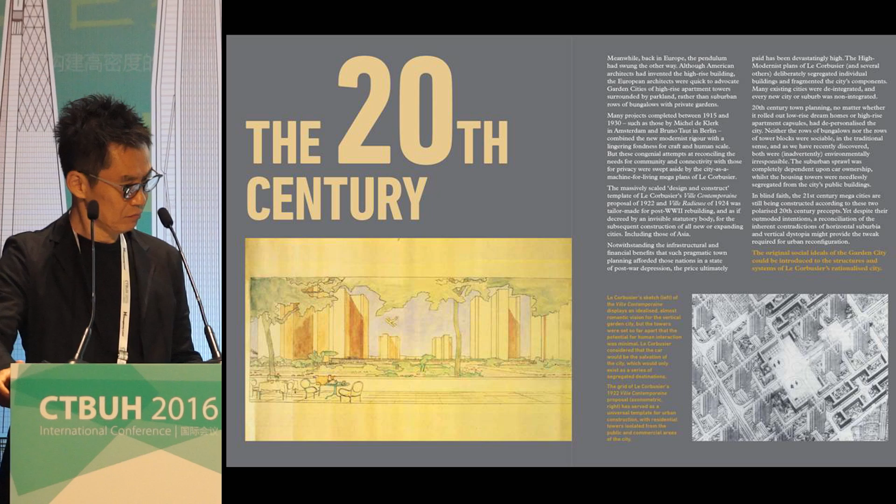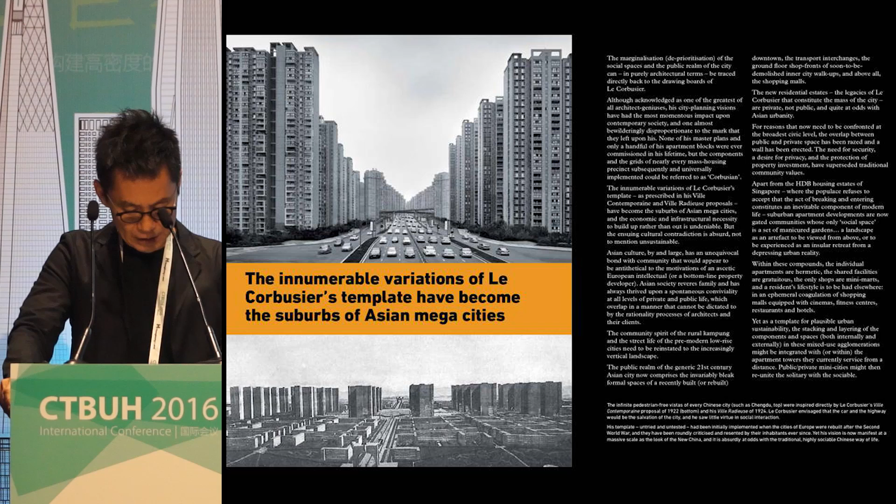Modern megacities are a joyless exploitation of the Corbusian paradigm. Our megacities are horizontally extensive, lacking in distinction, rather inhumane. Developments are distinct islands marooned by vehicular traffic, people regarded second to the automobile. Buildings tend to be mono-use, making it necessary to traverse the city to get about the day.

In the wake of the Industrial Revolution, the phrase Garden City was coined in 1898 by Ebenezer Howard, who perceived the possibilities offered by England's newly installed rail networks. London's workers did not reside within the metropolis, but commuted from pleasant new towns in the surrounding countryside. The garden cities were intended to be self-sufficient cities, separated by parks, connected by rails, and residents living in harmony with nature.

The exuberance of 1920s New York engendered heroic yet romantic visions for future cities which sought to further monumentalize Manhattan. The Metropolis of Tomorrow, as published by Hugh Ferriss, shows the city both traditional and futuristic, a humanly scaled metropolis. New York today is possibly the only sociable modern megacity. By virtue of its density, it's surely the most sustainable.

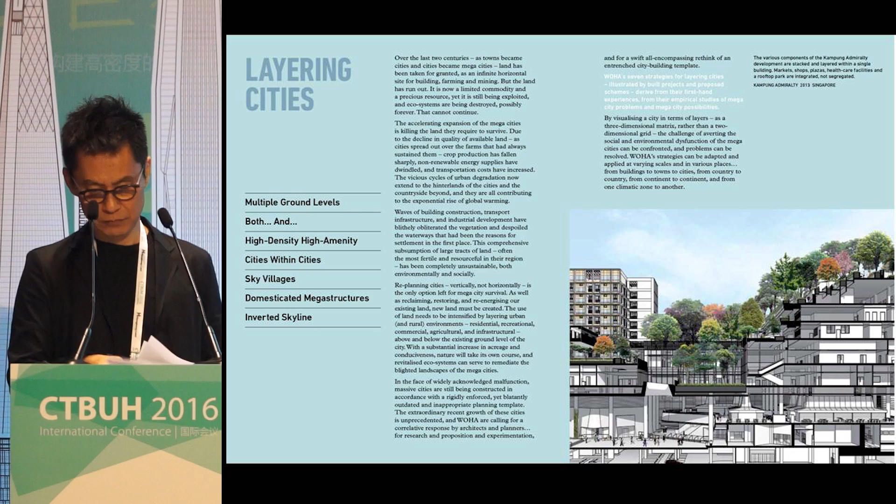Planting cities are strategies to make our concrete, steel, and glass built environment more human and livable, bringing people and communities together, and bringing flora and fauna and biodiversity back to the cities.

Breathing cities strategizes, encourages buildings to breathe again, finding the appropriate technology and typology to address differences in climate and cultures. Instead of a central core with sealed spaces, take a more open approach, with open spaces that could address both cold and increasingly warm weather.

Rating cities are strategies to encourage sociable architecture and sustainable cities. All too often, in our daily lives, we talk about plot ratios, site coverage, efficiency index, and so on, but these do not reflect the contribution to social and environmental sustainability. We propose the following: green plot ratio is the amount of landscape surfaces compared to development site area.

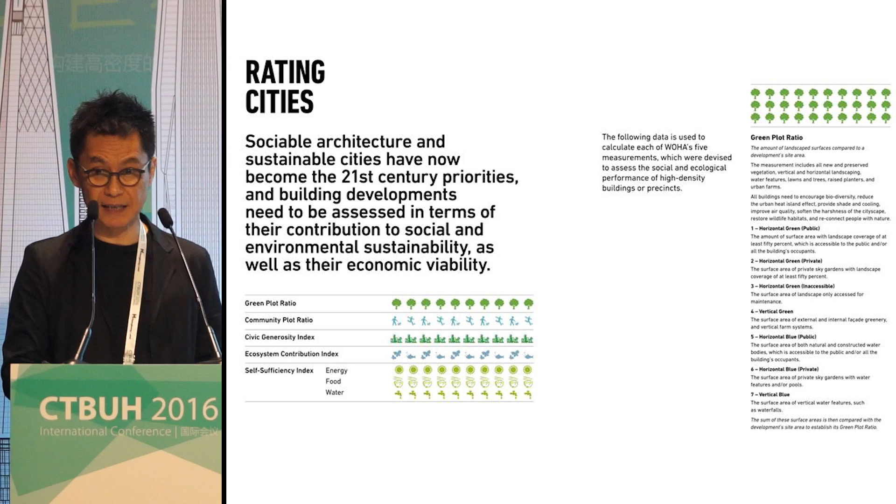Community plot ratio is the amount of community spaces allocated within a development site area. Civic generosity index is the extent to which a development encourages and facilitates public life of a city.

Buildings should be judged by human characteristics. Are they friendly? Are they generous? Are they accommodating?

Ecosystem contribution index is the degree to which a building supplements a city's ecosystem. This is necessary to reverse the environmental degradation caused by rapid urbanization, and we must now view buildings as homes for flora and fauna, as well as for people.

Self-sufficiency index is a development's capacity to provide its own energy, food, and water. In a sustainable city, buildings must aim to produce as much energy as they consume and more. In order to compensate for high maintenance buildings, buildings in cities must consider ways to produce food on roofs and facades. Buildings must be able to harvest and reuse all water that falls on the development site.

I will show a few 21st-century city prototypes. In this slide, you'll see we have listed our assessment tools. We use these to gauge our own performance and learn how to improve for future projects.

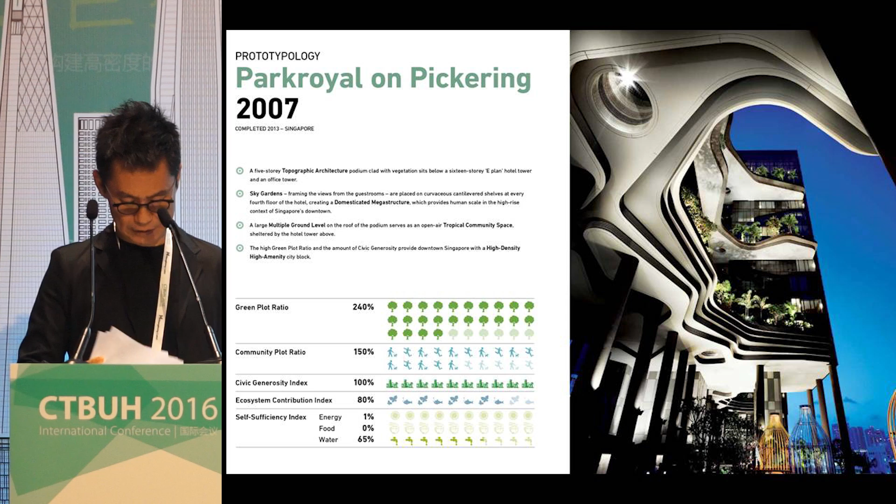Parkroyal on Pickering in Singapore is a mixed-use development comprising a hotel and offices. This project is about civic generosity, creating multiple ground levels, sky gardens that the city can enjoy.

We have achieved about 240% green plot ratio in this building, and you can see the difference it makes to a city. Creating multiple ground levels, vertical greenery, sky parks that are vertical and horizontal that the entire city could look at and enjoy.

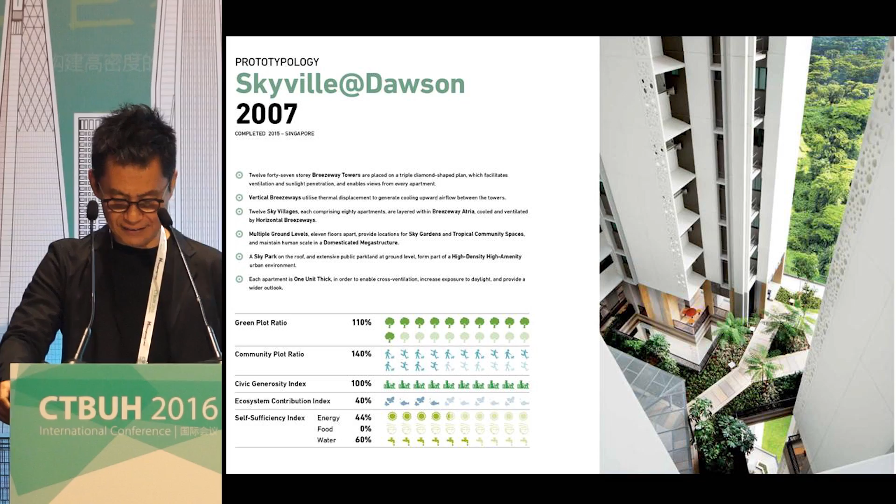Skyville at Dawson in Singapore is a social housing project of 960 homes. It's about creating high density and high amenities at the same time. The strategies we use here are breezeway towers, sky villages, sky parks, multiple ground levels, and domesticated megastructure.

These are community living rooms that are up in the sky as common spaces to the cluster of villages. This is a social housing project in Singapore, and we have to abide by the strict budgets that were set to us.

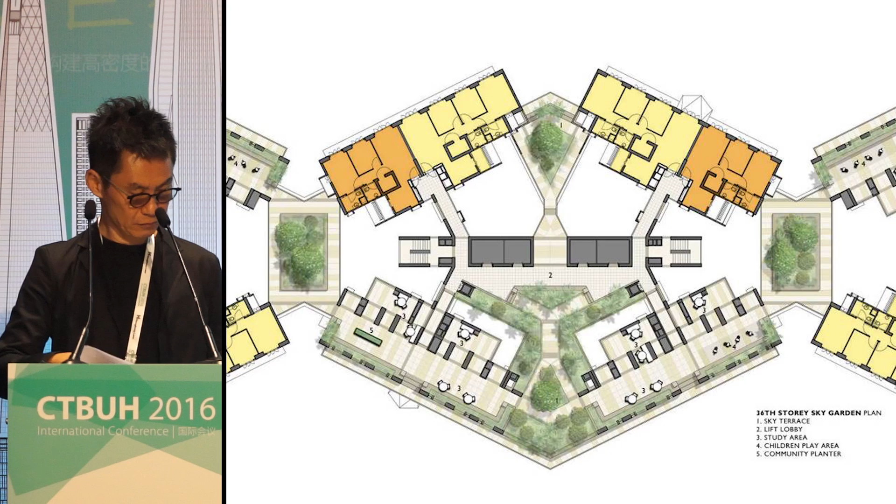This is a typical village cluster plan showing the community living room and the village green. This is a picture taken from the open corridors of one of the Sky Villages leading into the apartments.

What is important is the visual connection between the residents as they walk home to the apartments with their fellow villagers on the village green. This distance between the village green and the furthermost floor of a Sky Village is about 25 meters, a distance that you still can recognize a person.

We have replicated the ground level 4 times in the megastructure, creating 4 public sky parks. These parks you see in the slides are accessible by the public. It is not gated. Anyone can come here and use the park 24 hours a day, 7 days a week.

Instead of penthouses at the top of towers, on top of the towers, the roof is a fully dedicated park for the people. As this is a very bold and daring project, we wanted to know if the social engineering that we intended is being perceived by the residents. We commissioned a video interview with some of the residents.

No doubt this residential complex is quite big scale. It's like a concrete jungle, but yet at the same time, it is quite small scale in the sense that the units are actually housed within certain villages. They're actually connected by all these intermediate sky gardens. It makes us want to not just stay within our homes, but really to spend some time outside to just interact and bond with one another.

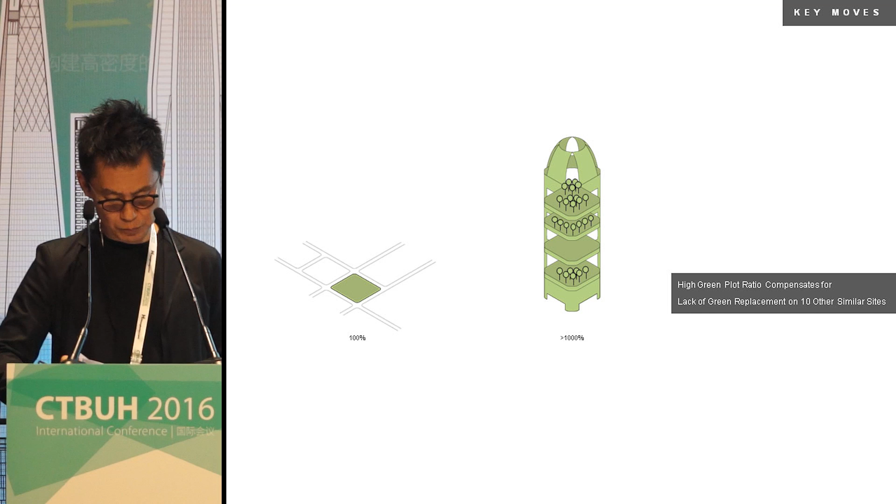With horizontal sky parks and gardens, they are inviting to flying animals. Coupled with a living facade, crawling animals and insects like squirrels and lizards can start to climb up the building like a tree to their horizontal habitats.

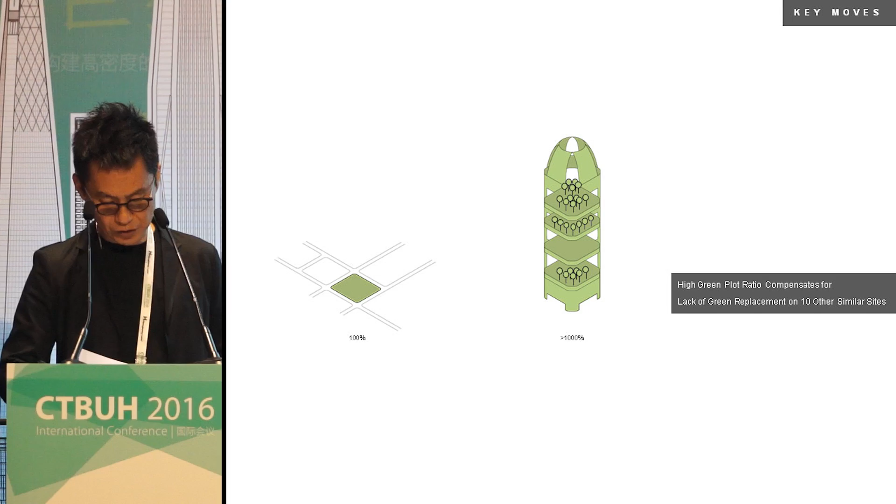The next video is a time-lapse video of the living facade. We anticipate that it will take another 2 to 3 years before it's fully mature.

This is one building where, at 4 levels of the sky gardens and terraces, you are able to see through in 4 different directions. As we didn't have a central core, the cores are the columns that are placed at the 4 corners.

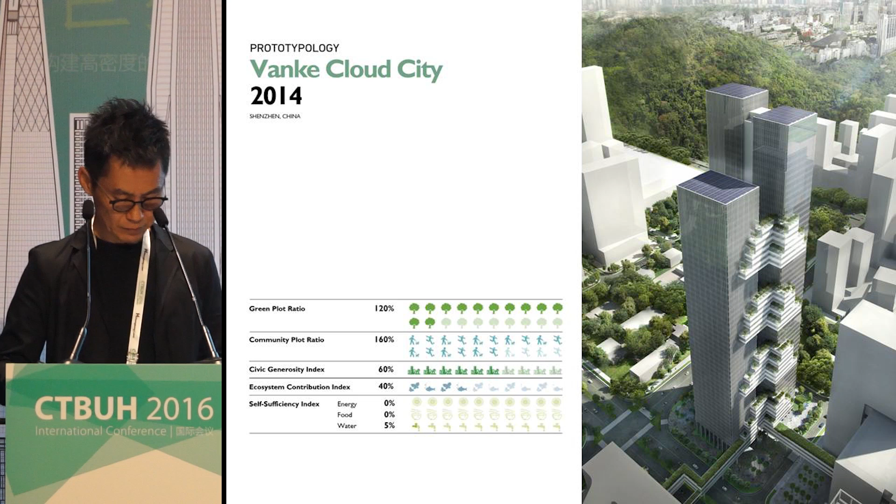Here you see this tower is an office tower that's more than 50 stories. We have created sky hills with sky gardens and terraces topping the hill. And you can actually see in the section the valleys that we created to induce an effective vertical hot stack effect for areas that we chose not to air condition.

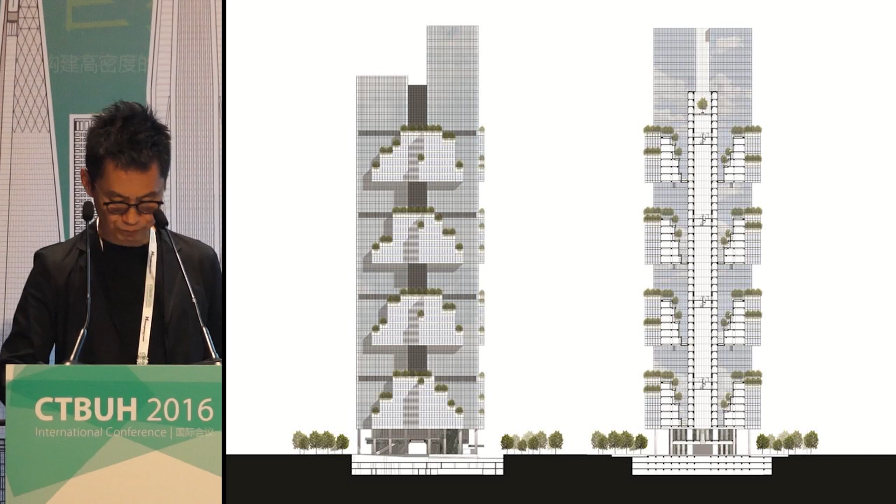Views of the sky hills with the sky terraces. And in the plan, the office lobbies are on the 2nd floor, and on the upper floors we have large, big office floor plates.

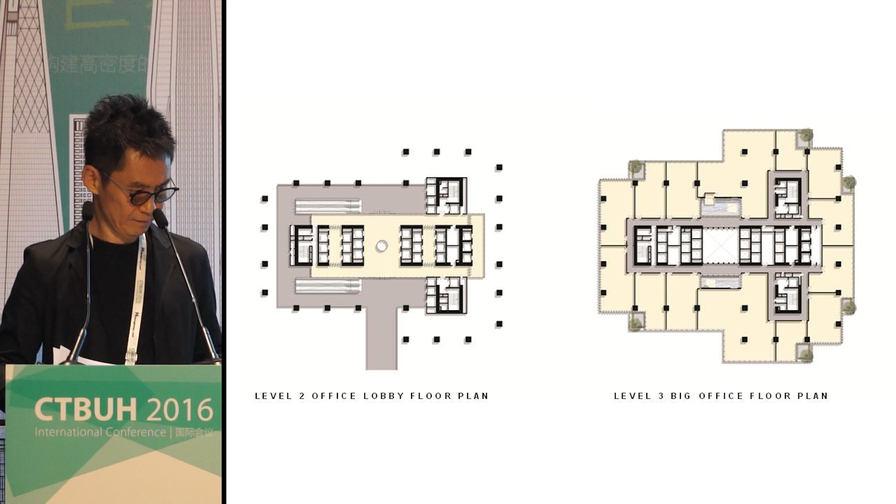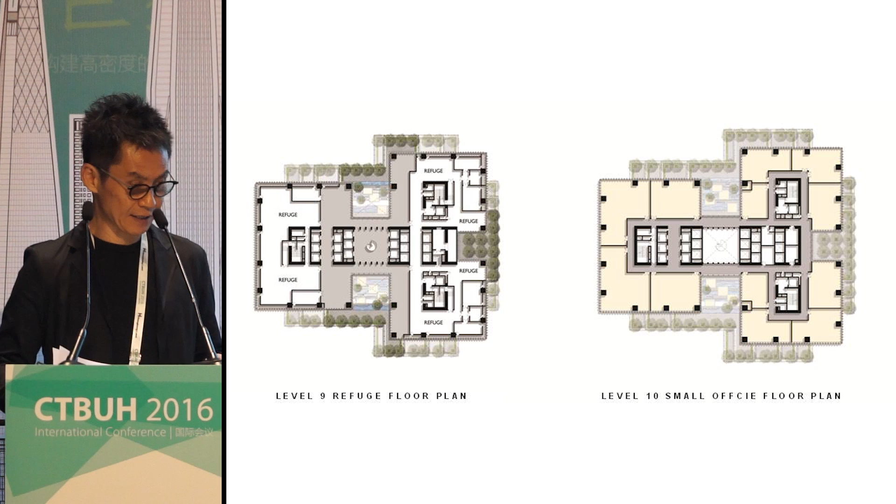On multiple new ground levels, we created valleys that have gardens people could actually come to utilize and have a breakout moment. And in one of the zoom-in sectional perspectives of one of the sky hills, you see the valleys where we have garden spaces within the skyscraper.

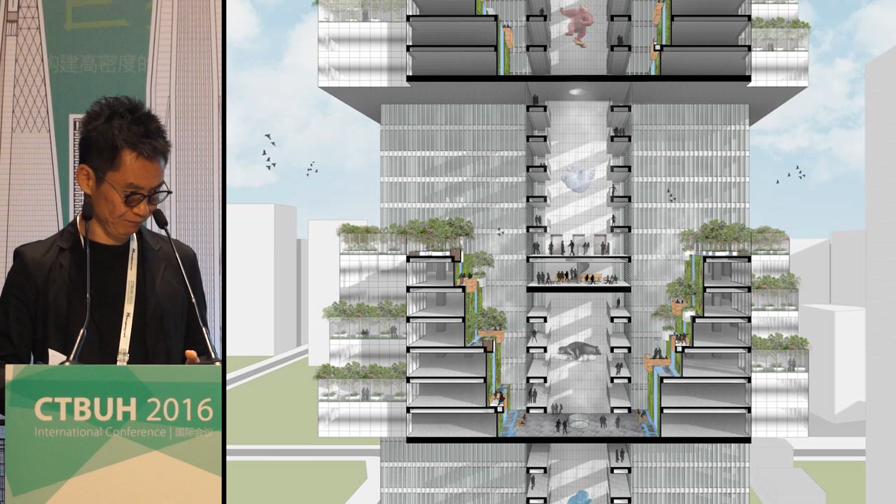What we have actually insisted on is that at every transfer level below, it's either a daycare facility or a cafe, 2 essential components to create life in the building. Here you can see looking out into the valleys and also looking down into the cafe or daycare center. And one of the sky terraces is part of the sky hills.

To end the presentation, I'd like to put across the point again. The proposition is a return to thinking that existed before the advent of the automobile, an apparently unlimited supply of fossil fuel, reimagining megacities as 21st century garden cities: dense, vertical, yet sociable and sustainable. Thank you.